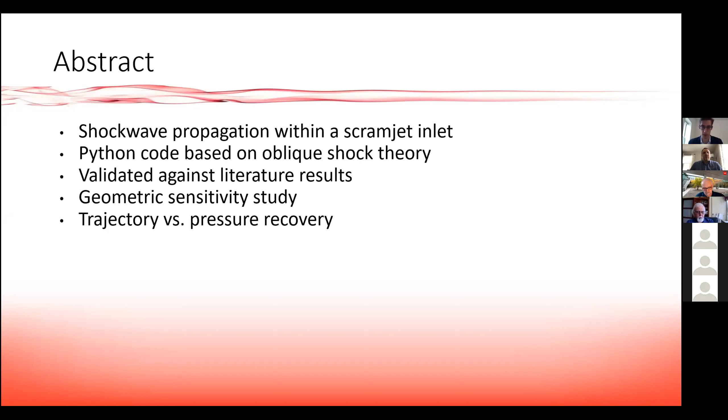I conducted a sensitivity study on scramjet geometry, just to assess whether there is any potential benefit in variable geometry. And finally, I defined a trajectory that would provide optimal conditions for combustion. And I derived corresponding pressure recovery throughout the flight as the scramjet accelerates from Mach 5 to Mach 20.

Each year, we can notice that increasingly more satellites are sent into space. But what is especially interesting is that small satellites start to dominate now.

Sending a satellite into space is not an easy task. We typically need a big rocket to send it into space, and that's why we send satellites in bulk. The orbit is typically determined by the biggest satellite on the rocket, which is not beneficial for small satellite providers. And that creates a need for much smaller vehicles that would be more efficient and would fly more frequently. And that creates a perfect opportunity for a scramjet.

So what is a scramjet? A scramjet is a revolutionary type of jet engine that is very simple in its principle. It has no moving parts. It has no compressor nor turbine. It achieves compression via a series of shocks generated by an inlet, just by its geometry, at supersonic speeds.

A scramjet consists of just, let's say, four parts. There's an inlet, as I mentioned, and its purpose is to provide sufficient compression for the combustor. Isolator, I'll discuss it in a moment. And the combustion takes place in a supersonic flow. And then the nozzle is used for expansion, just to maximize the exhaust velocity and maximize efficiency.

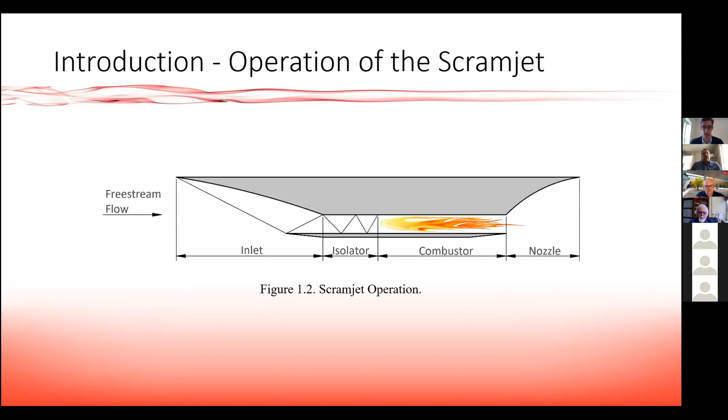There are 2 types of fuels we use for scramjets. Most commonly, hydrogen fuel, since thermodynamically it's the most powerful fuel. It also has the shortest reaction times, which are very important in scramjets. But it has a big drawback: the problem with hydrogen is that it has very low density. It takes a lot of space and requires very big tanks, which create a lot of aerodynamic drag. For that reason, hydrogen is preferred in space applications at very high altitude.

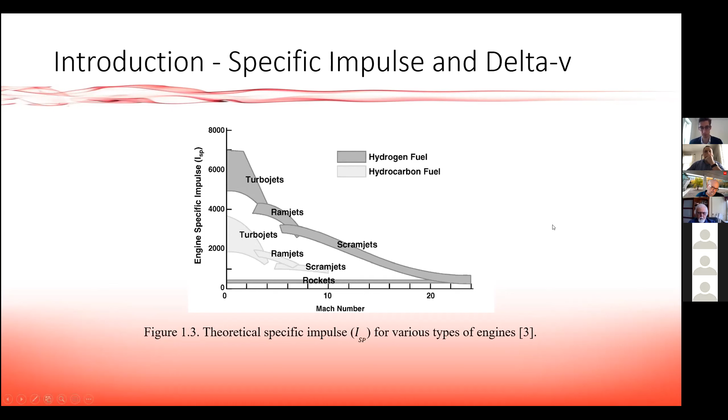Okay, moving on to historical perspective. The concept of scramjet is actually quite old. It dates back to the 1950s. And the first major test took place in 1967. It was a hypersonic research engine. Let me see if I can hide this.

All right, a hypersonic research engine was the first major scramjet that was installed on the famous X-15 aircraft. The aircraft was rocket boosted. It was accelerated to a speed of Mach 6.7, and the test provided a lot of valuable data for further research. It's interesting that it was a crewed flight. The crew was on board, and on that day, a world record was set for fastest crewed aircraft ever flown. From 1967, this record hasn't been beaten yet.

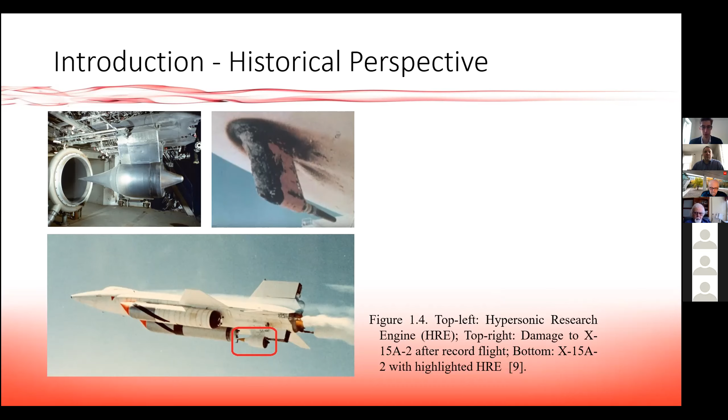Then in 2004, NASA flew its X-43A scramjet vehicle. It set a world record, operating for 12 seconds and achieving a peak speed of Mach 9.6. This is an official record for an air-breathing engine. To date, no other aircraft has flown faster.

The final test vehicle was the Boeing X-51 Wave Rider. That aircraft had a totally different strategy. All the previous aircraft I mentioned were utilizing hydrogen just to maximize efficiency and get the highest possible speed. The X-51, however, wanted to show that long duration flight is possible. It flew for over 3 minutes, specifically 210 seconds, at a speed of about Mach 5. Ultimately, it showed that scramjet flight is possible.

However, until today, the US has never developed a fully operational scramjet. The only country that has achieved that is Russia. Last year, they announced a missile capable of speeds up to Mach 9.

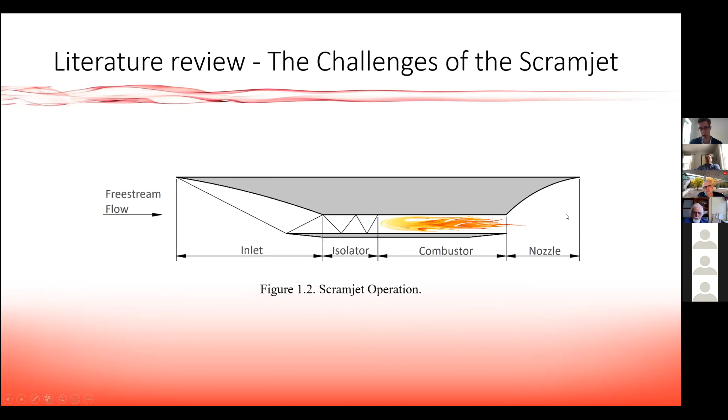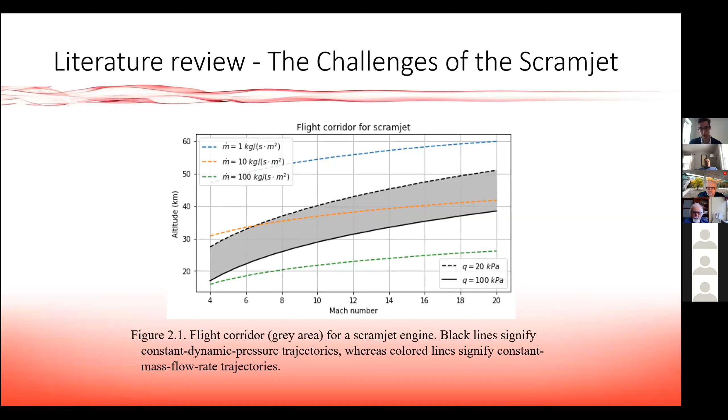Another problem: typically, at speeds beyond Mach 5, the flow is fully supersonic. That means combustion can take place in supersonic flow, which is very efficient.

However, in a flow that would normally be supersonic, the increase in back pressure from combustion can create a normal shock wave between the inlet and the combustor. And if that normal shock moves into the inlet, it impairs the inflow. This is known as inlet unstart.

It is a very undesirable phenomenon. It doesn't mean the scramjet won't operate—it will operate, but its efficiency will be very low.

For that reason, between the inlet and combustor, we have an intermediate duct with a constant cross-section area. This is called an isolator. An isolator's purpose is to be an intermediate stage that mitigates that pressure difference, which is mitigated via a series of normal shock waves.

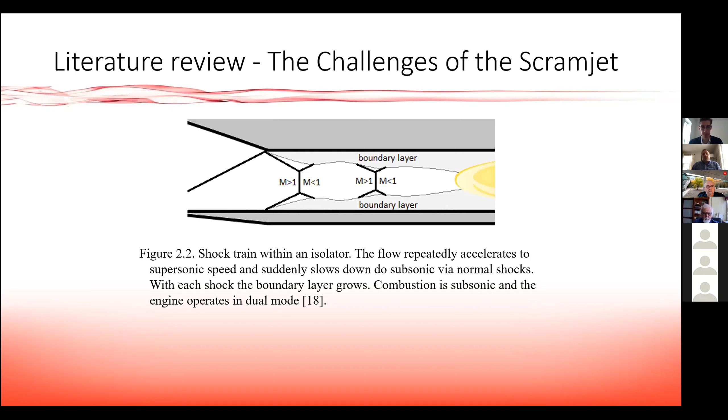What are other challenges of scramjet? There are many. A very important one is mixing and combustion efficiency, and especially time. It takes just a few milliseconds for air to travel from the front of the combustor to the end, and within those few milliseconds, air has to mix with fuel and combust. That's why at high speed, hydrogen is the only possible fuel.

Air dissociation problems: the temperature at which air arrives at the combustor has to be within a specific range. If it's too low, combustion won't occur. If it's too high, air starts to dissociate—particles of oxygen and nitrogen dissociate into single atoms, and at even higher temperatures, into ions and electrons. This obviously impairs combustion.

Aerodynamics and flight control within hypersonic flow are very difficult to model. And as I mentioned previously, simulation and testing capabilities are very limited even today. The fastest wind tunnels can achieve speeds of up to Mach 10, but only for something on the order of a few milliseconds. Longer duration tests can be achieved only with Mach numbers of about 5, 6, 7, but still it's only about 200 milliseconds.

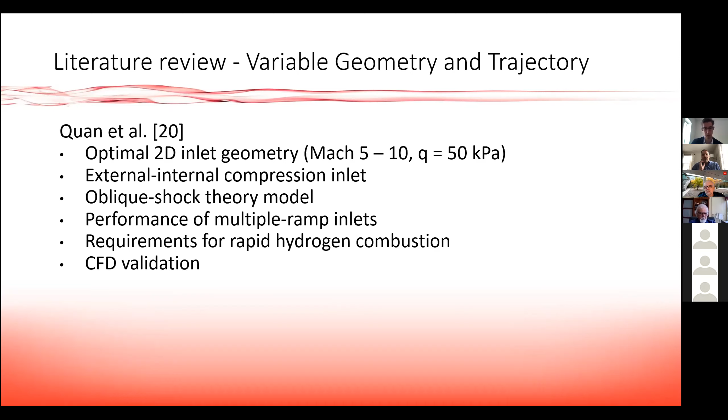They determined that the optimal one would be a three ramp inlet. They also stated requirements for rapid hydrogen combustion, noting that combustion time generally decreases with increasing pressure and temperature. They stated that minimal static pressure should be 50 kilopascals and the temperature should be at least 1000 Kelvin. They also validated the results against CFD simulations and achieved very comparable results, differing by just a few percent.

So here's an example of an external internal compression inlet. As you can see, most of the compression happens outside of the inlet, in the exposed area, and there's a bit of compression going on in the internal area. This is the most common layout for scramjets.

Typically scramjets are designed for one specific Mach number, known as the design condition. They are designed so that all of the shocks meet in a single point at the tip of the cowl of the lower body. All other Mach numbers are known as off-design condition.

Then Dalle et al. created a very advanced tool known as the SAMURI software, which includes not only oblique shocks but also expansion fans and boundary layer effects, so it includes effects of viscosity. This software allows them to provide very accurate results within a very short time. Testing of one geometry takes just 3 seconds, and that was on a personal computer about 5 years ago, so even today that would be faster.

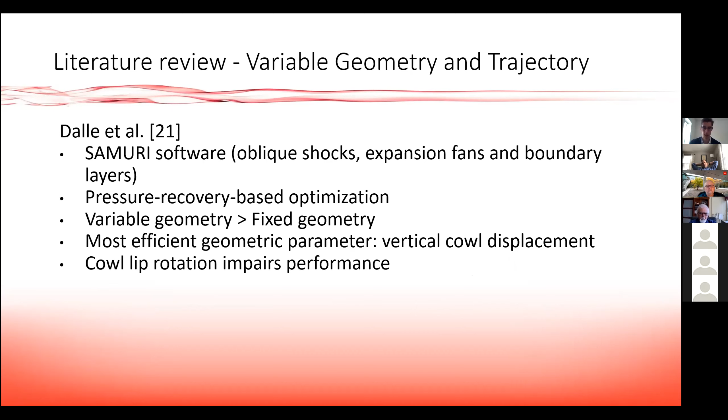With that software, they conducted optimization of geometry based on pressure recovery, wanting to maximize it. They showed that variable geometry is superior to fixed geometry for every design condition. According to their study, the most efficient geometric parameter is vertical cowl displacement, in other words the inlet height, the height of the lower body. However, rotation of the lip of the lower body can only impair performance and should be kept fixed.

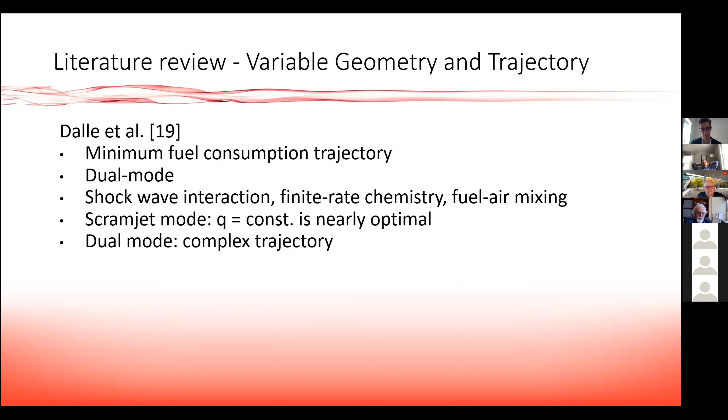Again, Dalle, in another study, investigated minimal fuel consumption trajectory. He showed that for scramjets, the constant dynamic pressure trajectory is nearly optimal. However, for dual mode, when those complex shock patterns occur, the optimal trajectory is more complex.

So now is a good time to state the objectives of my thesis. The main aim was to assess the advantages of variable geometry for scramjets. My main objective was to create a Python code that would simulate and visualize the flow field for very simple geometries. I also wanted to validate the code against existing results, investigate the effects of geometric variation on pressure recovery, and examine the effects of flight trajectory on pressure recovery.

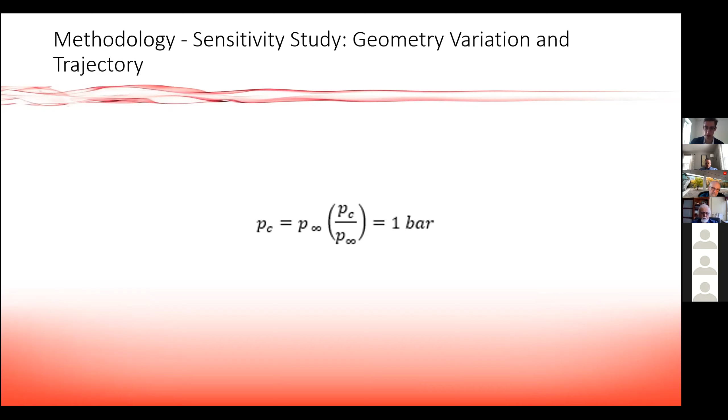The results: first of all, I validated my code against NASA shock software that is also based on oblique shock theory, and I basically achieved identical results. They only differ by a rounding error.

In terms of variable geometry, the main finding from my study was that the angular parameters, the angles of the wedges, can very precisely control pressure recovery. They affect it gradually, whereas all other parameters, the length parameters, affect pressure recovery discontinuously. They can only create or delete shocks.

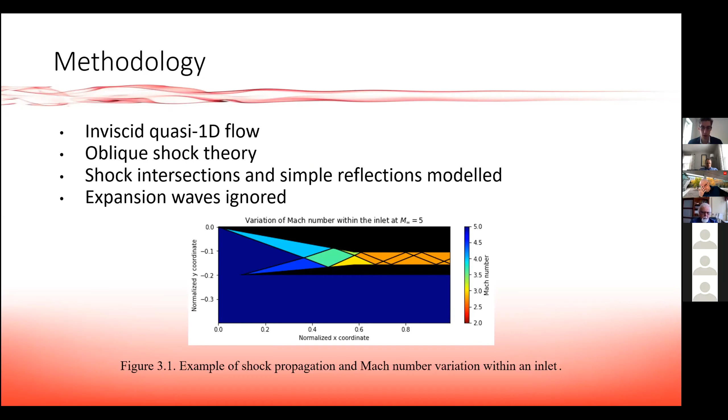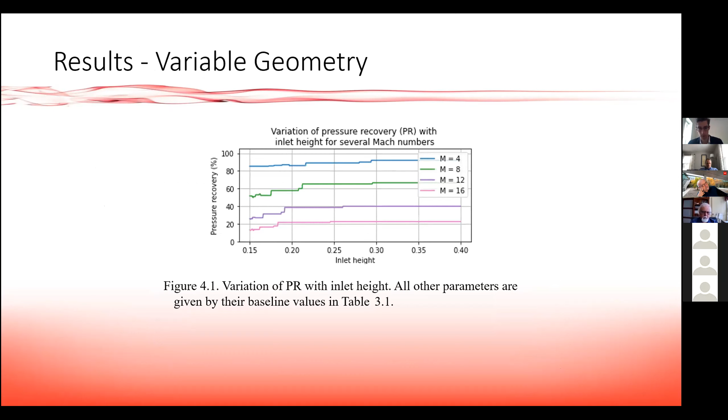However, if that shock pattern is squeezed, it can create space for more shocks, and more shocks can appear. That's why, with increasing inlet height, pressure recovery can increase discontinuously. That's the case for all of the length parameters.

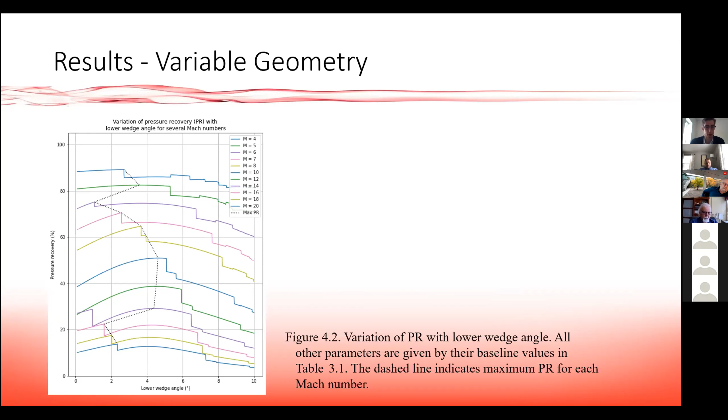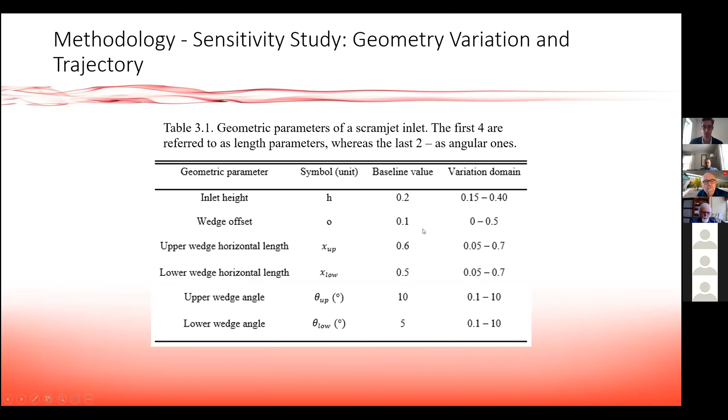Now, focusing on the trajectory, I have examined my baseline geometry, which was fixed. Once again, with these parameters: inlet height of 0.2 and so on. And with fixed geometry, some of the discontinuous changes are inevitable.

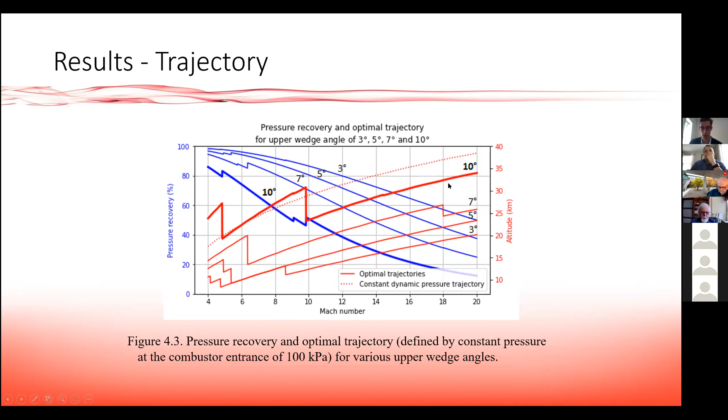And beyond that, the transition is very smooth. The change of properties is very smooth, and that's because from Mach 12 up to Mach 20, there's only one intersection.

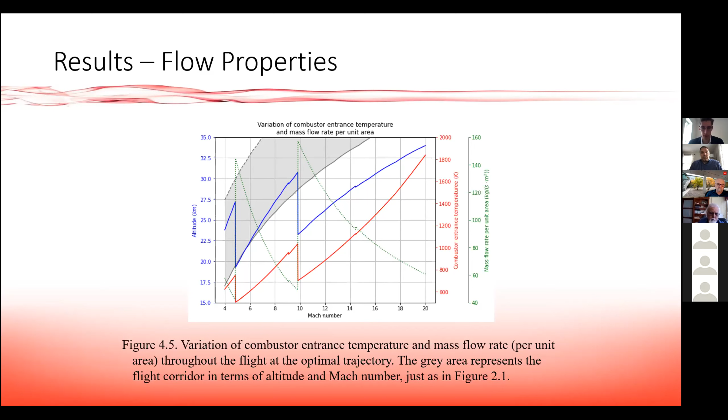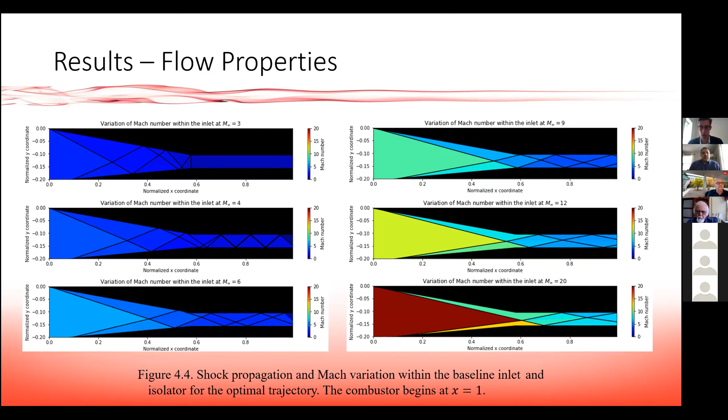And that would have to be mitigated with variation of geometry, preferably with inlet height. Imagine, for example, looking at this plot, that inlet height increases. When it increases, there is more capture area, and the inlet could capture more air, more mass flow rate.

And then comparing it to the results of aforementioned studies, when we compare my results to Quan et al., flow properties are very similar. Note that I had imposed a constraint on static pressure, that's why it's 100 kilopascals. It's very similar to the results achieved by those researchers, and surprisingly, pressure recovery is very, very similar.

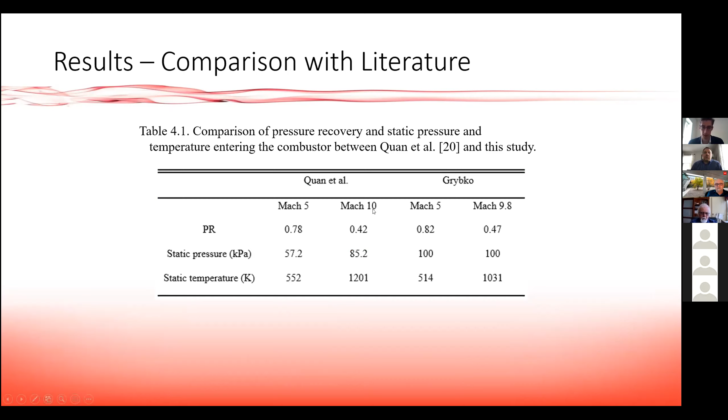And also static temperature shows that near Mach 10, the temperature is sufficient for rapid hydrogen combustion. Comparing my study to Dalle et al., I'm using a much simpler model - it is not as accurate as their model. However, the results are comparable. But the conclusions seem contradictory. And why is that?

In their study, Dalle et al. stated that inlet height is the most influential parameter on pressure recovery, whereas the rotation of the cowl, the angular parameter, is the least influential. In my study, it's the opposite. Now, why is that?

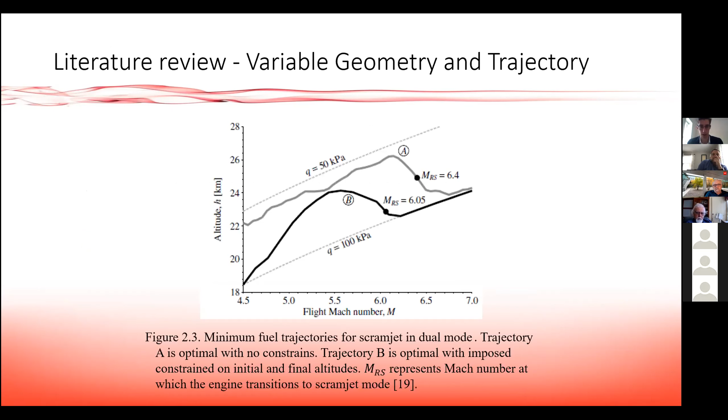Well, in fact, we investigate different kinds of geometries. So looking once again at external, internal compression, you can see that for most of the speeds, at low speeds, the so-called air spillage is the problem. Air spillage occurs when that shock misses the cowl, and as I mentioned, a lot of compressed air does not get into the inlet. It goes below the scramjet.

In their study that was investigated, they considered the mass flow rate into the efficiency. I didn't, and for that reason, the inlet height in their study is very important.

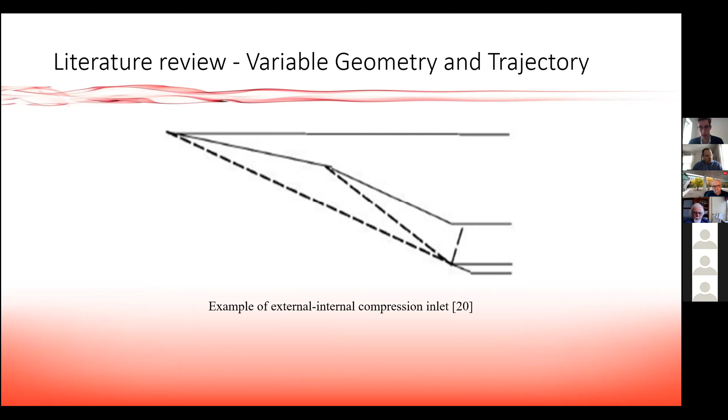And in terms of cowl lip rotation, well, let's imagine what happens when you rotate that part upwards, for example. It pretty much only creates drag, and that's why they stated that it impairs performance.

In my case, I did something different in terms of cowl lip. I didn't rotate the entire element, I only changed that angle. And as a result, it didn't create much more drag, but it provided much more compression. And that's why it has so much influence on the performance of my scramjet.

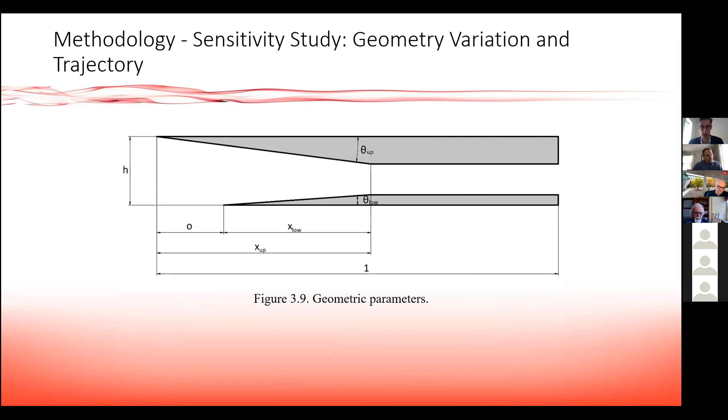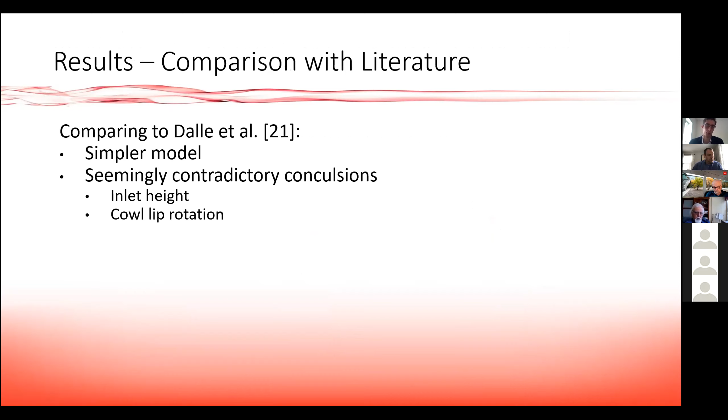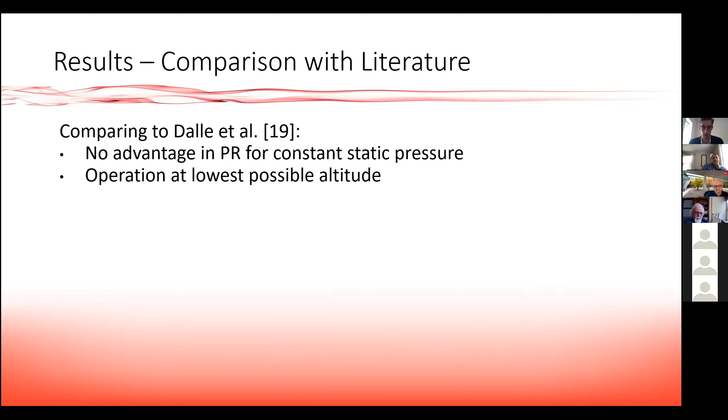And then comparing it to the second study of Dalle, focusing on the trajectory, the constraint I imposed on my scramjet brings no advantage in pressure recovery. The scramjets, in fact, should operate at lowest possible altitude just to maximize temperature and pressure within combustor. But obviously, they have to stay within structural limits.

So the conclusion is that scramjet is a very promising technology, but it's extremely challenging. The United States has not created a fully operational vehicle, but that's going to change very soon. Right now, scramjets are utilized for military purposes only, but that's going to change very soon.

I'm sure that within a decade we can expect civilian applications such as delivery of spacecraft to orbits, or even commercial hypersonic flights. Imagine that between any 2 points on Earth, you will be able to travel within just 2 hours, maybe even 1 hour.

So as part of that thesis, I developed a Python code that is capable of simulating flow field through a simple 2D scramjet geometry. I assessed the benefit of using variable geometry. I considered only single ramp internal compression inlets, and I varied 6 geometric parameters and investigated their effect on pressure recovery. Correspondingly, I plotted trajectory and pressure recovery for any Mach number between Mach 4 and Mach 20.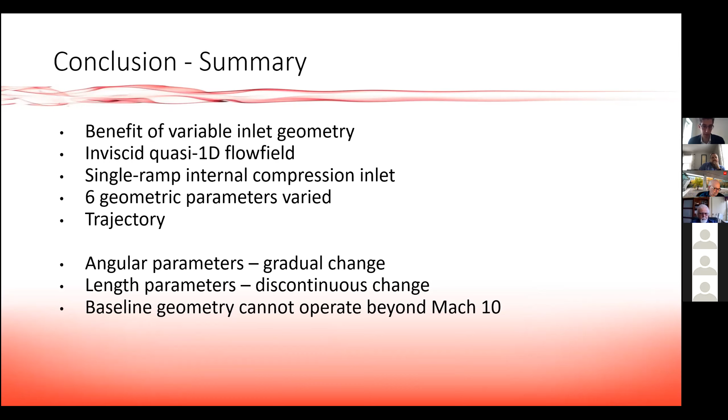For the baseline geometry that I tested, it was shown that it cannot operate beyond Mach 10. However, up to Mach 10, it would operate very well. And preferably, I would use hydrocarbon fuel, and I believe that geometry, that fixed geometry, could be utilized for missiles.

For the future work, I certainly would expand this thesis with optimization. I provided a very good foundation for optimization. I investigated the effects on pressure recovery, and now I could develop a mathematical model that would maximize pressure recovery throughout the flight. I could also increase the fidelity of the model. I could certainly include the effects of expansion waves. However, they'll be quite complex.

And with regard to trajectory and determining an optimal trajectory, I could expand my model by including combustion effects or even flight dynamics effects. Thank you for your attention, and I am awaiting your questions.